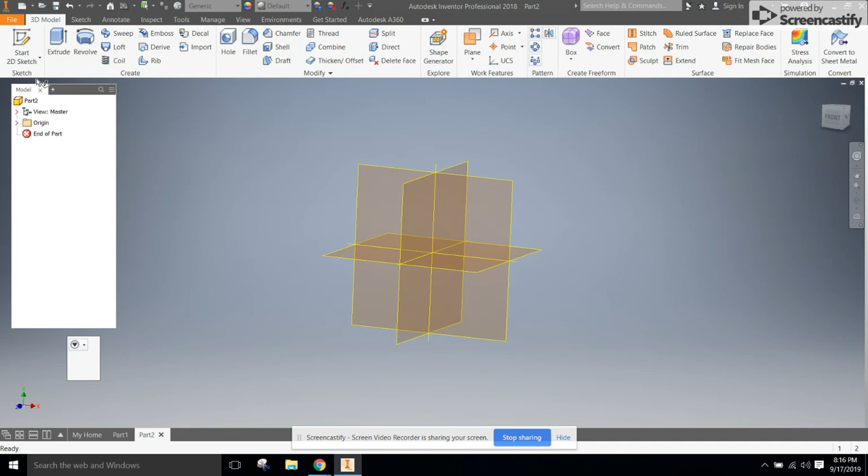Okay guys, I'm going to go ahead and lay out the 16-foot wall with the 3 stud corners. I'm going to start a 2D sketch. I'm first going to start with the sole plate, or bottom plate, sometimes called a mud sill, but it's a 2x4, which is 1.5 by 3.5 laid on edge. Typically it's treated in construction, but I'm going to go ahead and lay that out. It's 16 feet long, so I'm going to draw that.

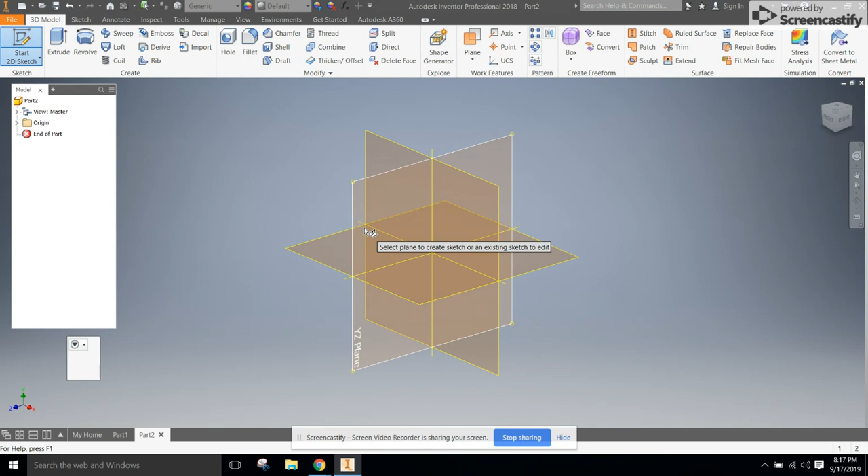I'm going to choose the YZ plane, and I'm going to begin by drawing a rectangle that is 1.5 inches tall. I'll enter 1.5, I'll hit tab, 3.5 and then hit enter. And then I'm going to go ahead and complete the sketch. Go to my home view here, and you'll see there it is.

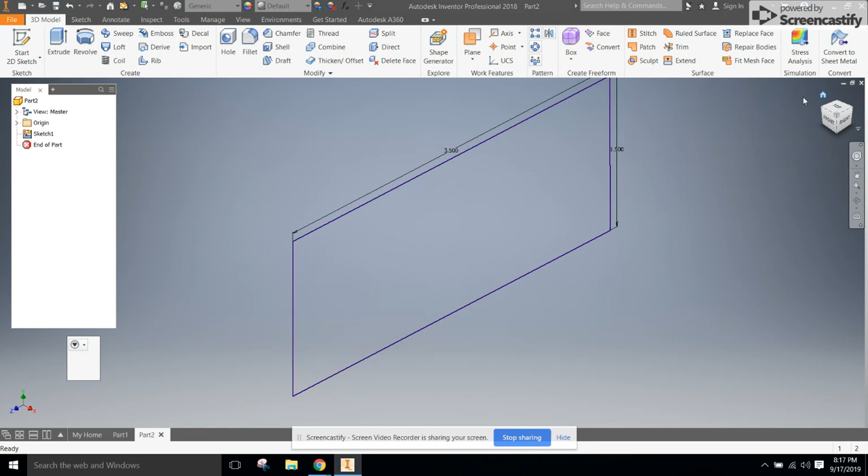Now I'm going to go ahead and extrude that 16 feet, 16, and if I put an apostrophe there, Inventor will interpret that as feet, and you can see there I now have a 16-foot long 2x4 modeled. Again, it's 1.5 by 3.5.

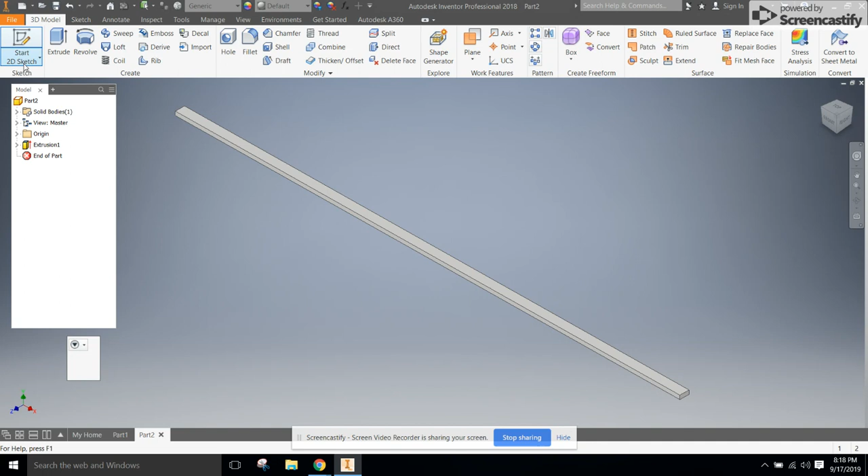Now, if I look here at my plans, I have 3 studs starting at the left corner, or the left edge of the 2x4, that extend up. I'm going to go ahead and model those by sketching rectangles that are 1.5 by 3.5, which is the cross section of a 2x4. And again, that's going to be 1.5. Notice I'm just entering before I even do anything. 1.5 by 3.5, that's already there. I can just hit enter.

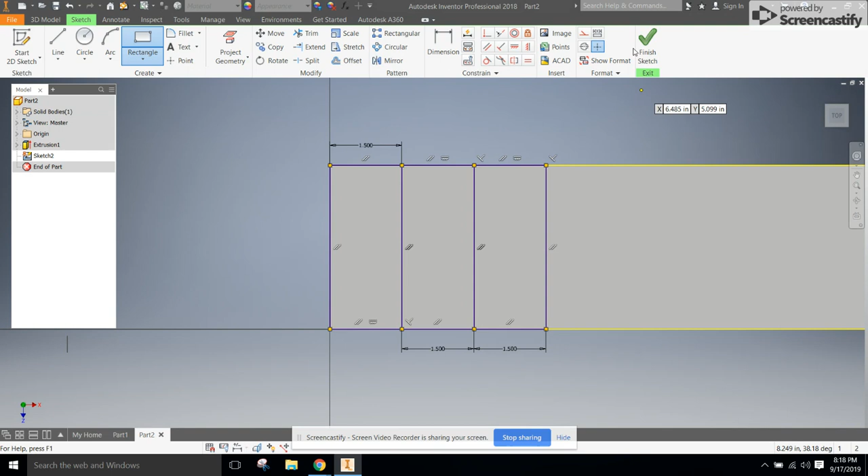I'm going to go ahead and model all 3 of them while I have rectangle hit. I'll go ahead and hit 1.5 and enter. And I'm going to go ahead and model the last one, and that's going to be 1.5. So when I do that, I'm going to get 3 rectangles here. I'm going to then extrude those up, and the question naturally becomes how far to extrude it. I don't want to extrude it 16 feet, so rather I want to do a little math here.

I can see over here the total height of my drawing is 97 1/8, but that includes three 1.5 inch sections of 2x4, so it's going to be 97 1/8 minus 4.5, which comes out to 92 5/8. So I'm going to type in 92 5/8, and it will convert it for me.

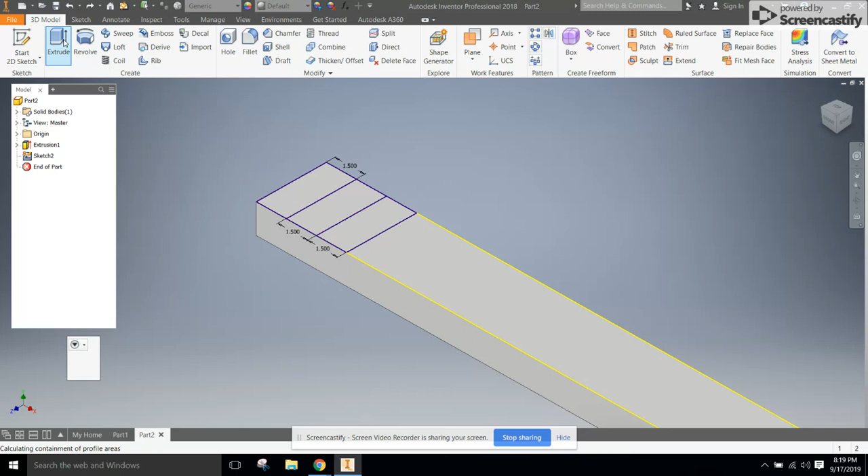Now, you'll notice with this extrusion, it all looks like one piece, and I don't necessarily like that. So I'm going to go back and redo my extrusion. And when I do it, I'm going to hit this little magic button right here, which says new solid. You'll notice that 92 5/8 is still there. I hit OK, and you can see that it extrudes it as 2 separate pieces. I actually made a new solid.

The drawing is no longer available. If I were to hit extrude, I can't; I have to draw a new sketch, and I don't want to do that over. So what I do here is I right click on sketch 2 and hit share sketch. That'll allow me to use that sketch again. I do have to hit new solid every time so that it keeps giving me new pieces. And I've put 3 studs here on the end.

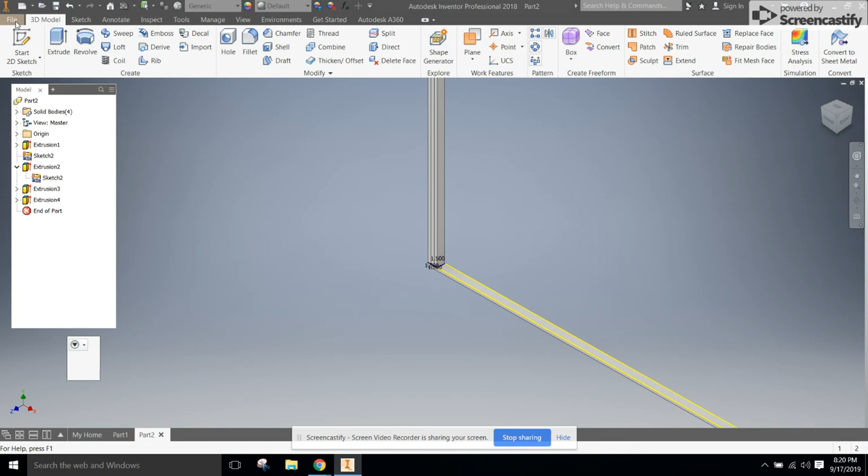It looks pretty good. If I want to change it now, I can. If I'd rather model in wood, I can come over here to iProperties, which is under File. I go all the way to the right where it says Physical, and I can change that from a generic material to wood. The closest thing to what we'd frame with would probably be birch.

I hit Apply and close, and now you can see that it's starting to look like a wood frame, which is what I'm after. So going back, I'm going to go ahead and add some studs here.

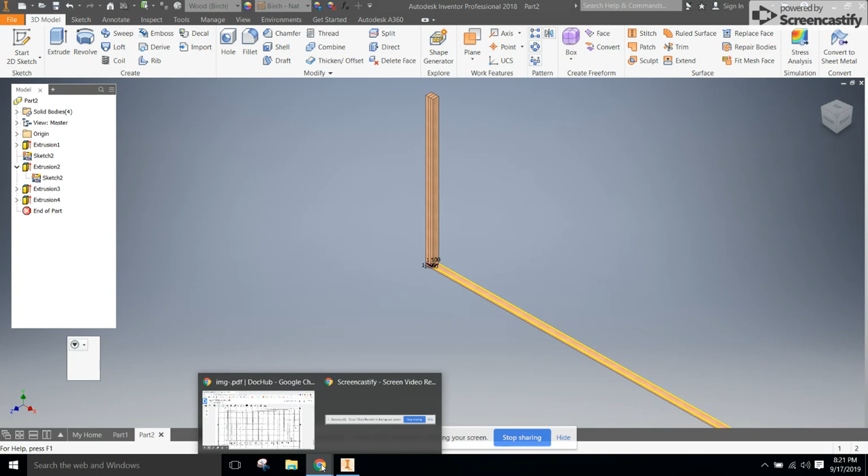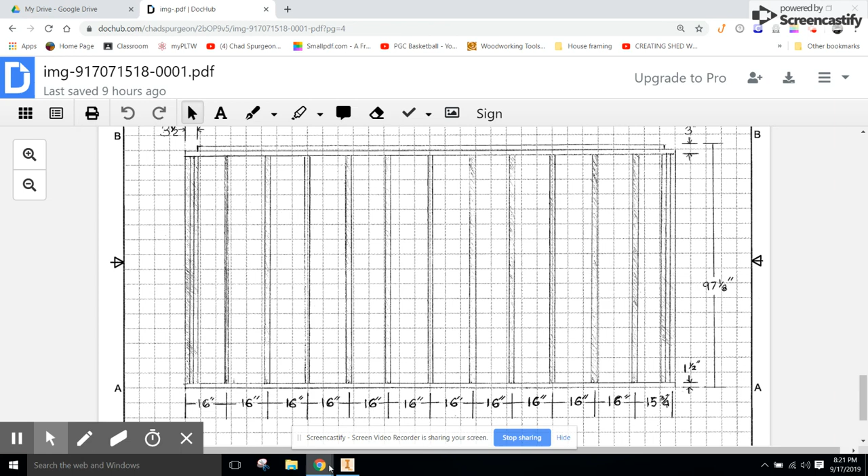Going back, I noticed that there's a stud here whose center is 16 inches from the left edge of the wall. So this left edge here is actually going to be 15 3/4 of an inch from that left edge. Any framing tape measure, any tape measure you'd buy in the United States, probably has this setup on it, so it's very common.

So what I'm going to do is add a rectangle, and I'm just going to kind of put it on here at random, lining it up with the stud, but it's going to be 1.5, and I can go ahead and hit enter, and then I'll dimension that over.

So this edge is going to be 16 inches. Oh gosh, I said that incorrectly. It's 15.75, which is 3/4 of an inch from that edge.

Now, with halfway across the stud being 3/4 of an inch, I've incorrectly done that, and I'm going to want to change that measure to 15.25, which would make it 3/4 of an inch to the middle plus that 15.25, which would be 16 inches. So that's how that's going to line up, and that would be ready for extrusion.

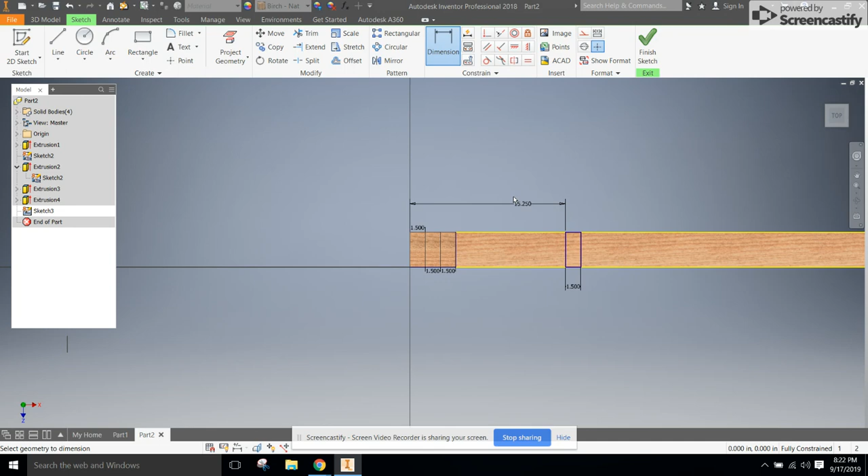I'm going to go ahead and add the rest of my studs in cross section here, utilizing the copy command. I'm going to copy all 4 sides. You can see they change their shade of blue, and I'm going to use precise input and choose a base point.

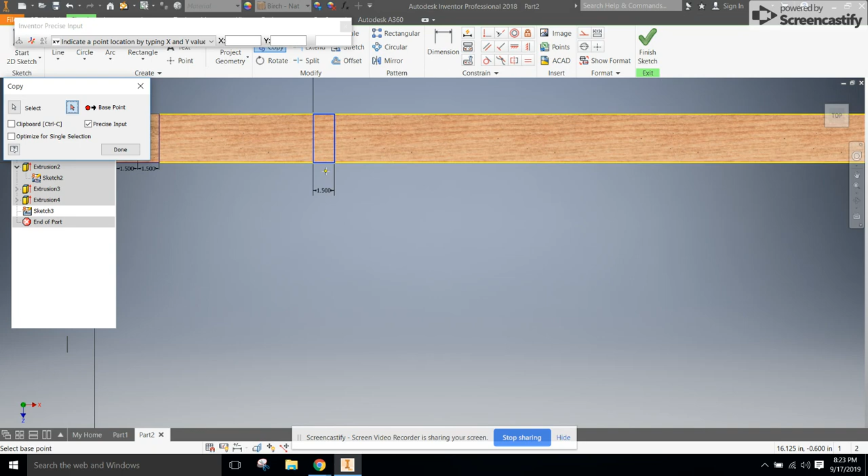The base point I'll just choose along this, and then I'm going to move this down to here, and I'll type 16 because I want 16 inches between corresponding points. That's what it means to be 16 inches on center. And then I can go to 32 and place that.

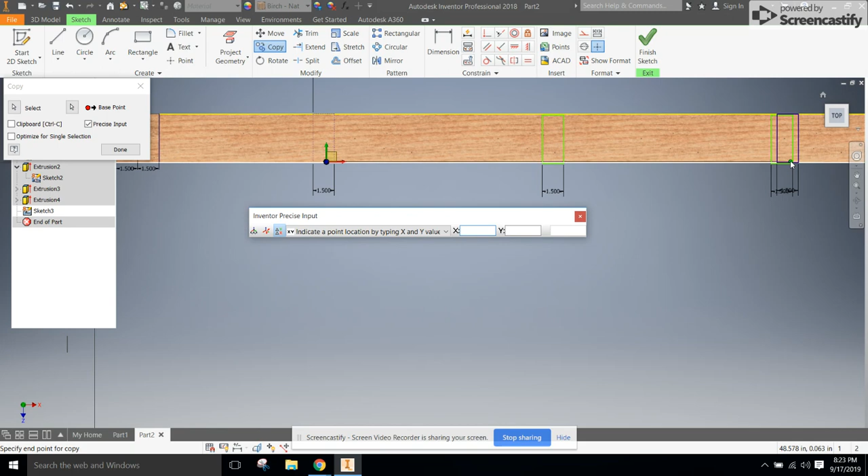I'm going to go ahead and make this a little more comfortable. 32, 48 would be my next measurement. If you ever looked at a tape measure, you'd notice that this is how that goes. My next one, 48 and 16, would be 64.

I'm going to just keep on doing multiples here. 64 and 16 would be, I believe, 80. If I make a mistake here in math, I apologize. 80 and 16 is 96, which would place it right there.

96 and 16 would be 112. I'll place that right there. 112 and 16 would be 128.

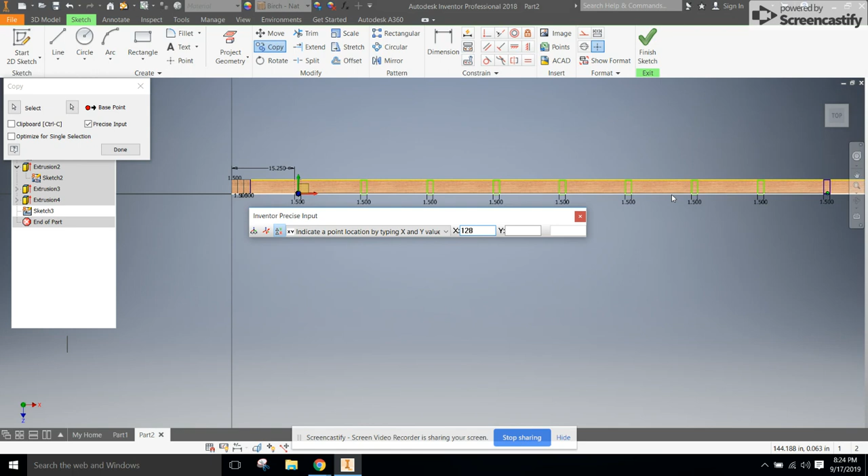I'll have to go ahead and scroll in and out a little bit. Let's see, 128 and 16 would be 144. 144 and 16 would be 160. I like that math. And then 160 is 176. And you see that's going to put me out on the edge, and that's not realistic.

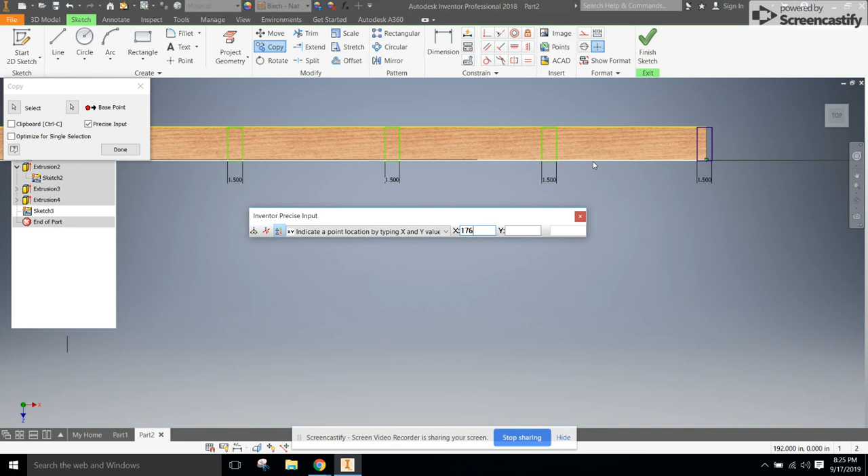So that last one I'm going to X out of, and I'll hit done. And then I'm going to go ahead and put 3 studs in that have to exist on the right edge of the wall also, as I look at it. Again, that's going to be 1.5 by 3.5.

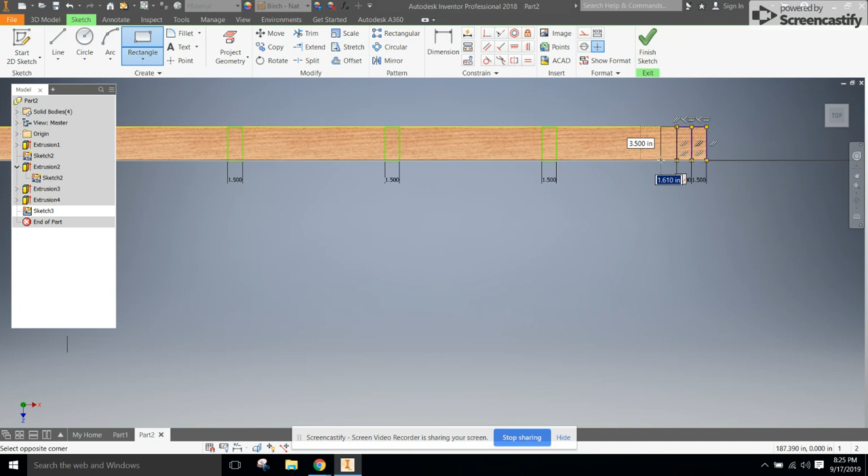I'm going to go ahead and add 3 of the studs right now, being careful that my corners line up. And let's see, 1.5, enter. Okay, now at this point I can finish my sketch.

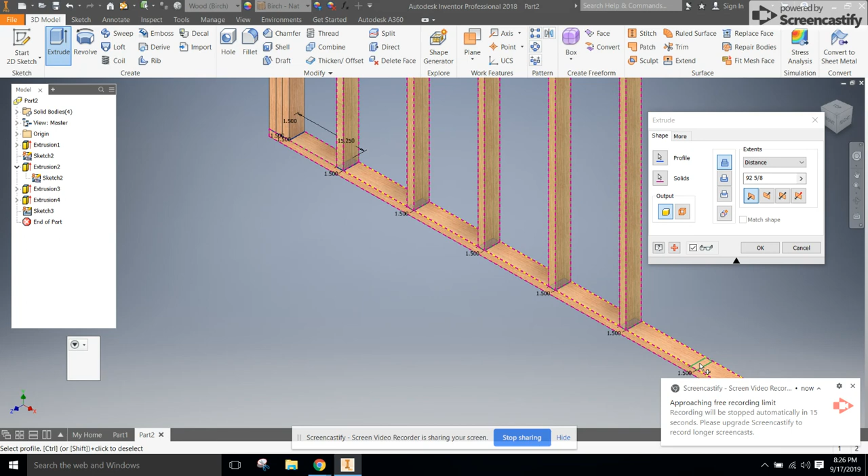Looks like I'm going to reach my recording limit, so I'll have to continue here in part 2. Just going to finish out this wall.